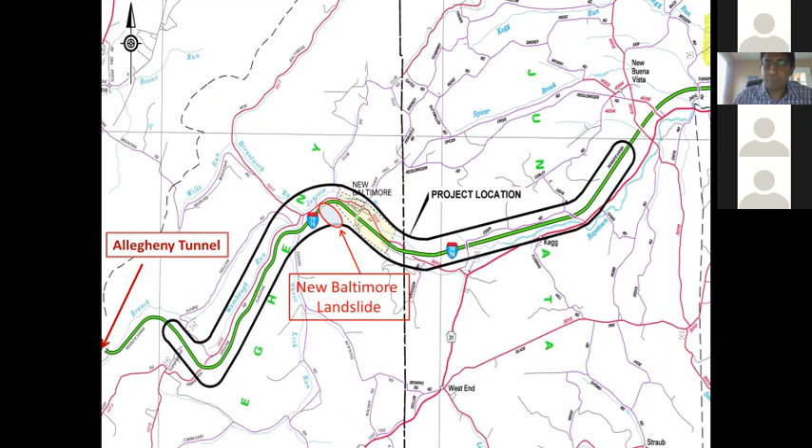All right, for anybody that was not aware of this location, here is the Pennsylvania Turnpike, and this is Allegheny Tunnel, and this is about 3 miles east of Allegheny Tunnel. So if you are going east, you would be able to see it on your right-hand side around milepost 126 on Pennsylvania Turnpike, which is I-76.

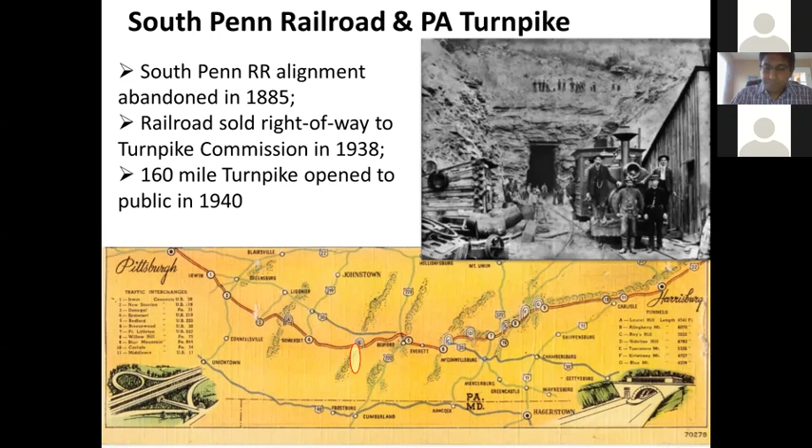A little bit on the history side. Pennsylvania Turnpike originally was constructed along an old railroad alignment between Pittsburgh and Harrisburg, and this 160-mile stretch was open to the public in 1940. As many of you know, the PA Turnpike was the first national superhighway. So what happened was, during the construction, as they were following the original railroad alignment, they had to widen the track area and had to excavate into what was an ancient landslide. And that basically resulted in a huge landslide at the time.

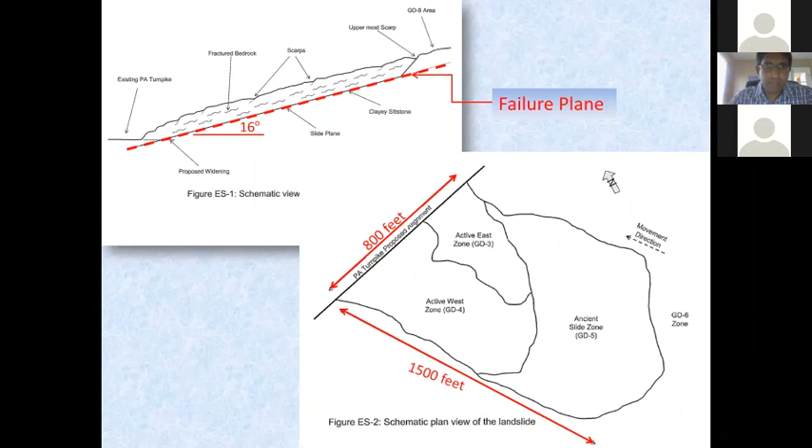Anytime you are dealing with a landslide investigation, you have to basically come up with a generalized geologic cross-section based on field observations, recon surveys, geotechnical borings and additional instrumentation. But before we really get into the instrumentation, you have to have a good model of how the landslide is happening. So this was just to give you an idea of how the subsurface conditions were.

As I said, this was the Turnpike alignment, the dash line, and you could see that everything was moving along a soft clayey siltstone, which was bedding at about 16 degrees. And the strike of this bedrock bedding was about parallel to the alignment.

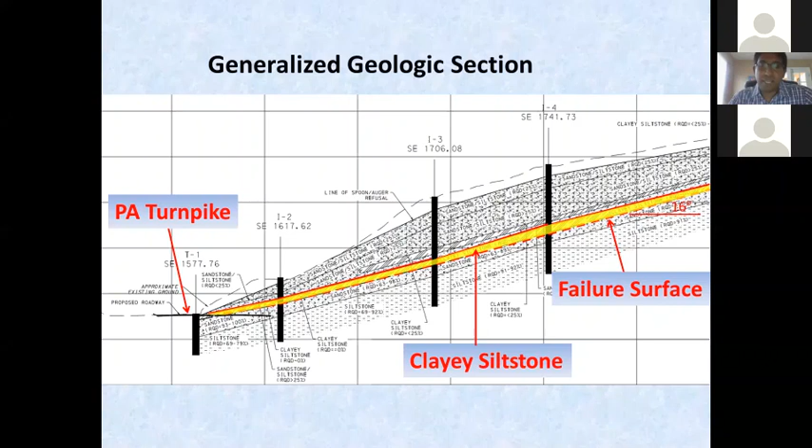And the reason why we had to even remediate this landslide was because the Turnpike, as part of the total reconstruction, had to widen it into the landslide, which means we were going to reactivate an already pretty active landslide. So, as I said, we are not going to be talking about how the slide was investigated, but instead we'll be talking about how we monitored during the design phase.

As part of the monitoring, survey is a very basic and the first tool that is typically used in any landslide monitoring. And then you get into the actual instrumentation that could involve various tools like extensometers, TDRs, inclinometers, piezometers, and all kinds of stuff. But the type of instrumentation and the amount of monitoring depends on the complexity of the problem, as well as the availability of time and the consequence of the failure.

For example, if it was actually moving at a much faster rate and there is a huge consequence to the property as well as human life, obviously you would not be wasting your time prolonging the instrumentation process. You would be jumping on to how to remediate it. But in this particular case, the slide had been moving for over 75 years at an average of 10 to 12 inches per year. So we had quite a bit of data to use in our instrumentation program.

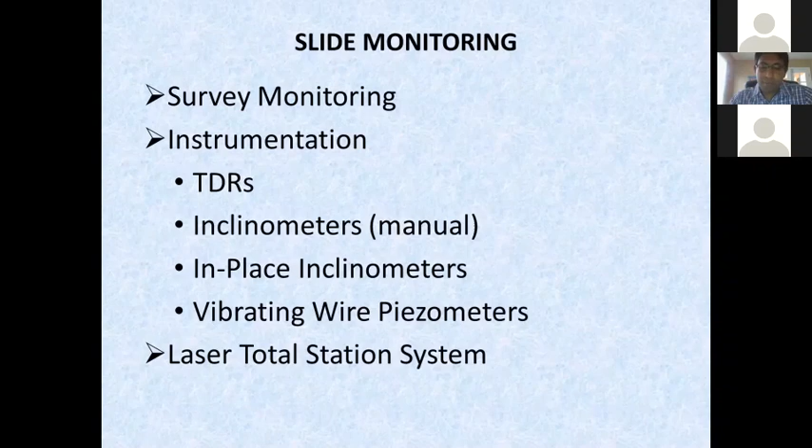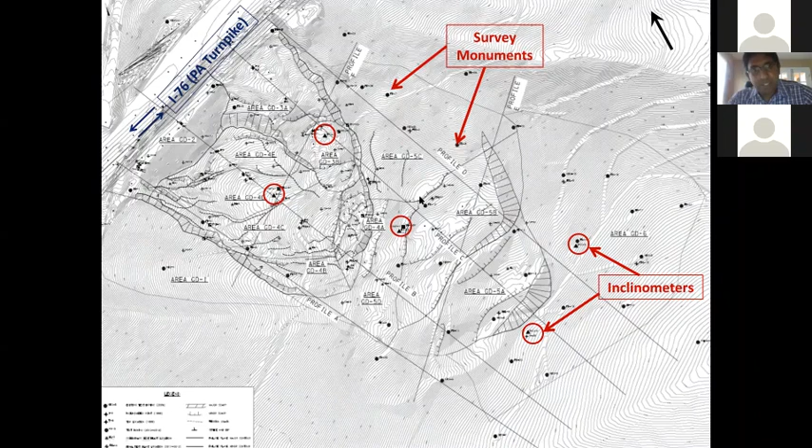This might look really overwhelming, but all I really want you to look at is this is a plan view of the landslide. This is the Turnpike, and the dots that you are seeing here are the survey monuments, and the circles are the inclinometer locations.

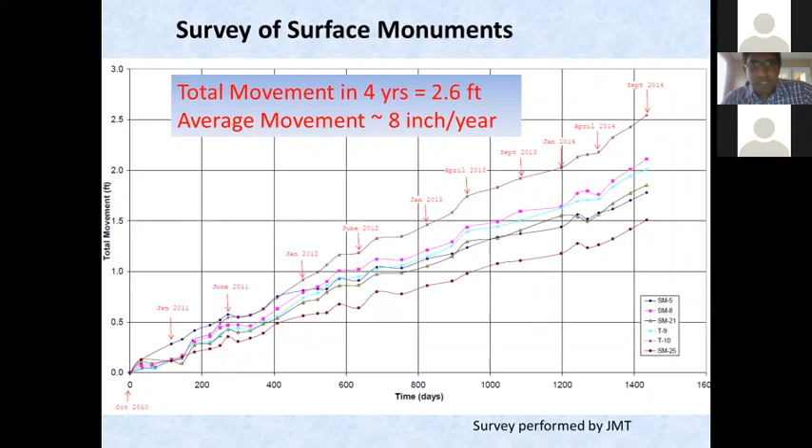All right, the survey was done very much from the beginning of our investigation on more like a bi-monthly basis. The data that is shown here was really the data collected from October 2010 to 2014, about 4 years of data. This gives a pretty good sense of the rate of movement, and as you can see, it is generally a uniform rate until you really dig into the localized zones to see which area is moving at a faster or slower rate, and which times of the year it is moving. So that actually gives you a lot of good information that also helps in developing an actual instrumentation program.

So early in the investigation, we used TDR monitors. TDRs were originally developed by electrical engineers to monitor the deformations in coaxial transmission lines. In principle, it is very simple. You run a coaxial cable in a 1-inch PVC pipe installed within a borehole that is all grouted. Basically you send an electromagnetic pulse into this cable, and the reflection time is recorded. So anywhere you have a kink, the delay in the reflection time gets translated into the actual displacement at that particular location.

So this is what you get out of this instrumentation. You can see that this was the initial data, and after a few months you get the data. After 2 months you had these green data points, and then after the last set of data you could see this blue line. And obviously this is the failure plane where you didn't have any displacement. The depth is plotted on the horizontal scale in this particular one. The nice thing about TDRs is this is a great tool, especially when you don't know exactly where the failure plane is. So in that case, you install this, and after 1 or 2 data points, you would be able to pinpoint exactly where the failure plane is located.

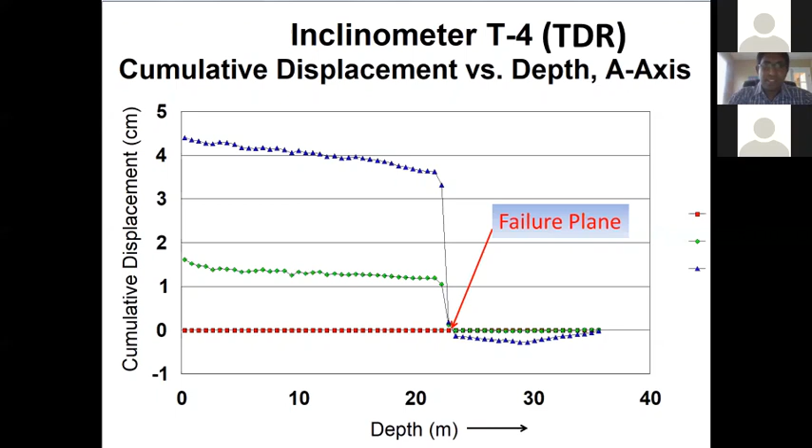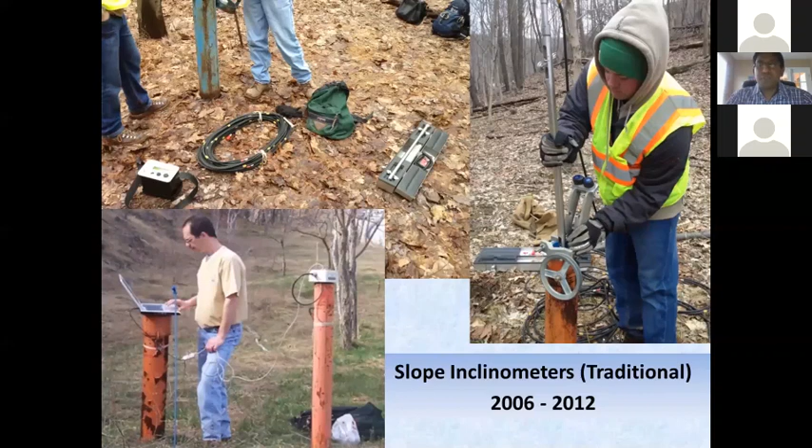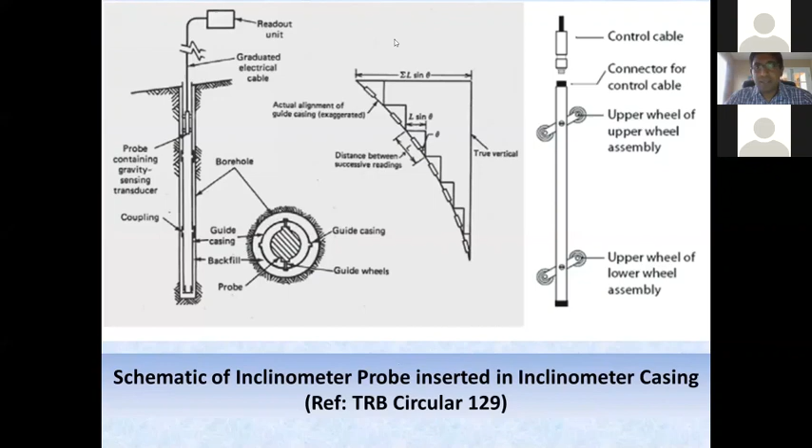And then in the early 2000s, we started using traditional slope inclinometers. Melly already went through some of these in his presentation. It involves running a slope inclinometer probe through casing, which has 4 grooves spaced at 90 degrees apart. And the probe runs on 2 sets of wheels. The sensors within the probe involve servo accelerometers or tilt meters that measure the angle with the vertical. So that gets translated into the movements. So this is what you really get. This is the depth, and this is the movement. These are the different data points taken at different times. You could see the cumulative displacement, and also you can see exactly where the failure plane is.

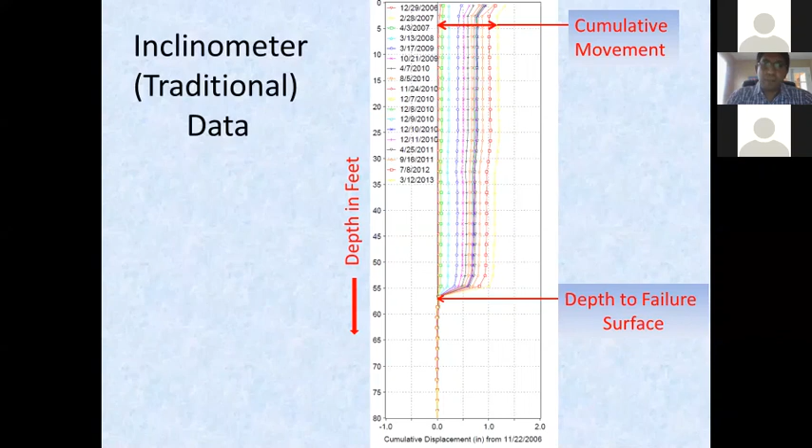The only problem with the traditional inclinometers was that you had to go physically and take the data. And especially when you're talking about a landslide as big as in New Baltimore, you're talking about 2 hours of trekking up and 2 hours hiking down, which was not an easy task, especially if you're carrying a lot of instruments. So that's when the Turnpike invested in in-place inclinometers. In principle, they work exactly the same as the traditional inclinometers, except these probes were installed at the locations where we want more information. So in this particular boring, we installed the sensors at 5 feet spacing. The nice thing about this is they are installed within the inclinometer casing, and the readings are continuously taken. So you get real-time monitoring, and they were connected to a cell phone modem that would allow you to access the data whenever you want on your computer remotely.

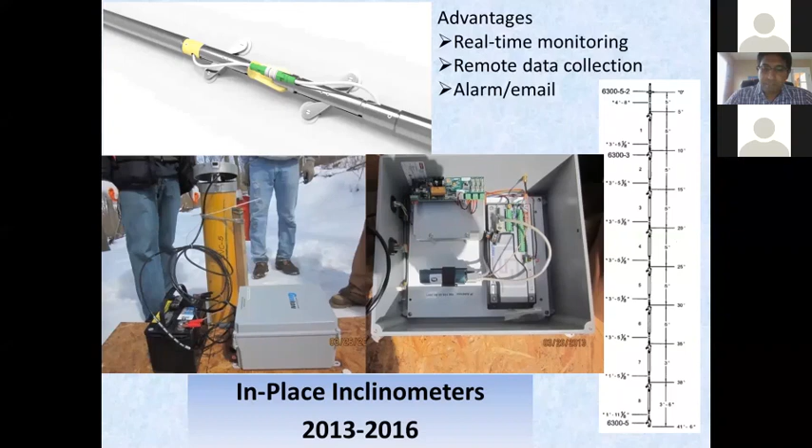So this gives us pretty similar information as traditional inclinometers. Just a quick point: you can see that the spring and early summer is when you get most of the movements, and in the fall and late fall it slows down. The basic reason is that obviously there is a lot more rainfall in spring that really accelerates the landslide movements.

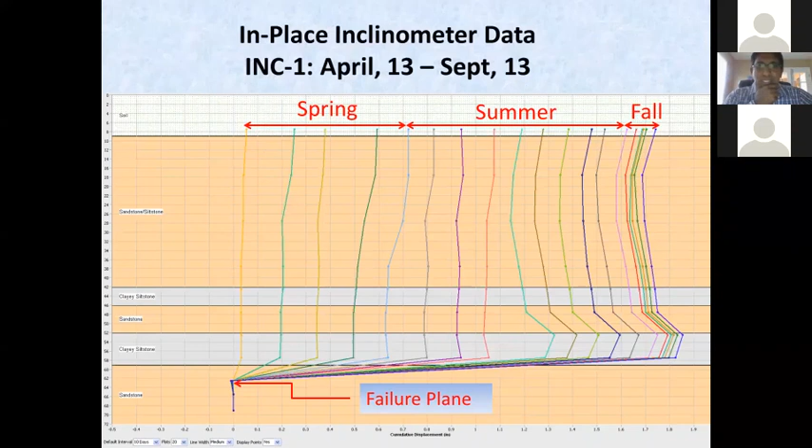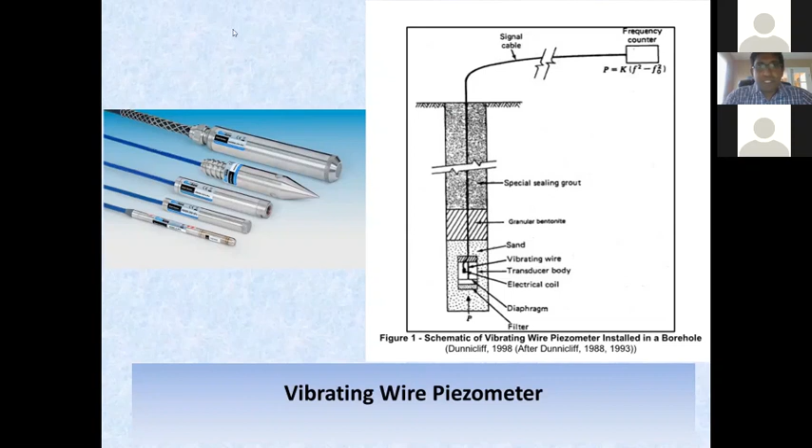The other very important tool in landslide monitoring is piezometers. There are 2 types. One is just a standpipe piezometer that gives you the depth of the water table, but what we use is the vibrating wire piezometer, which allows you to measure the change in the pore water pressures. The nice thing about that is you could see the pore water pressure changes with time. So every fluctuation in the pressure could be related to the movement and the lag time within the slope inclinometer data. That really gives you a sense of how the rainfall, pore water pressure, movement and lag time are all interrelated.

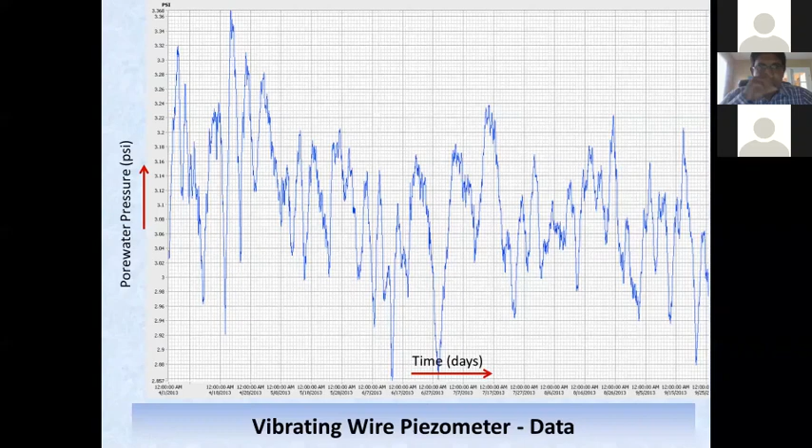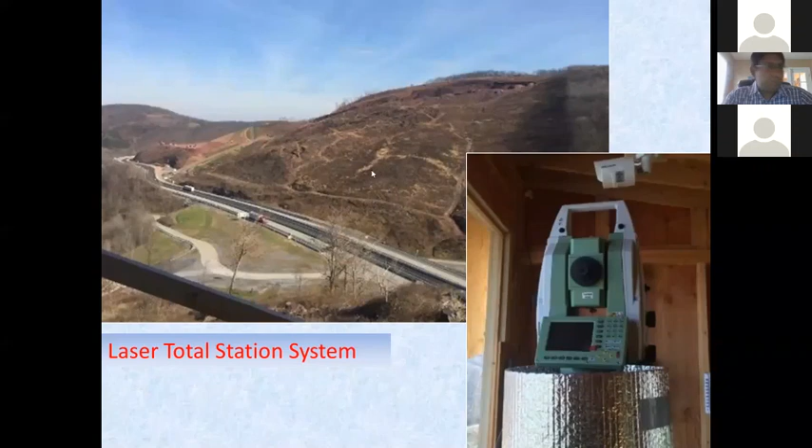During the construction, we used the laser total station system, which Melly already explained, which is essentially just a regular survey total station system installed on the other side of the turnpike on a hill, mounted in a shed powered by a solar panel, and it was shooting lasers into prisms installed all over the slide area to continuously measure the movement of the slide. And similar to in-place inclinometers, you get real-time data, so you get a sense of how the slide was moving as the construction was going on.

Sorry, Suresh, you can take 2 more minutes if you need.

Okay, sure. Thanks. There are limitations with this total station system: the accuracy of the data depends on the distance, the temperature, humidity, fog, and all kinds of things.

But the nice thing about it is if there was a significant rate of movement, this could really capture that and send you an email message or an automatic text message to alert you, and that really helped us during the construction to control all the movements. Fortunately, none of the trigger levels were really kicked in, and that means everything went relatively smoothly.